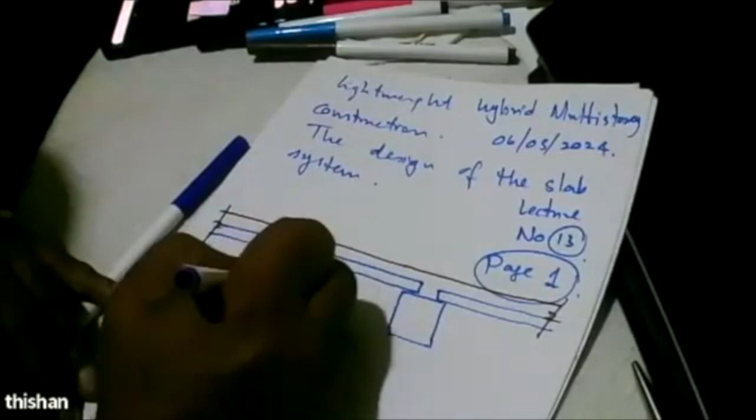This is the in situ cast concrete. Then we looked at this possibility of having a link like this, because we did not want to have connections only through bond. We always wanted to have a positive connection. So we run an 8mm bar that way, and then we have a bar to lock it, and then we have the top reinforcement for the slab running up to 0.3L.

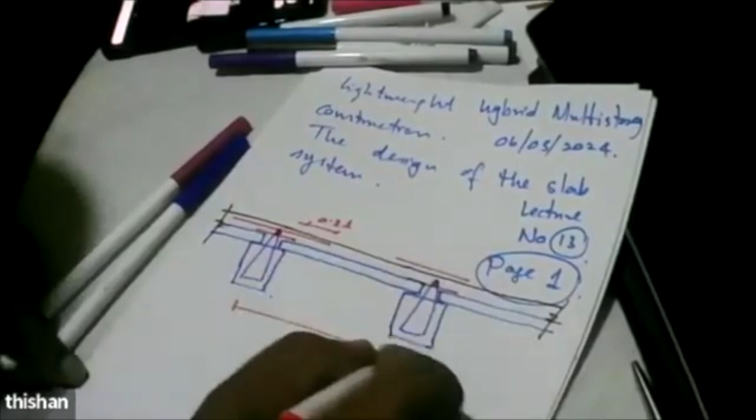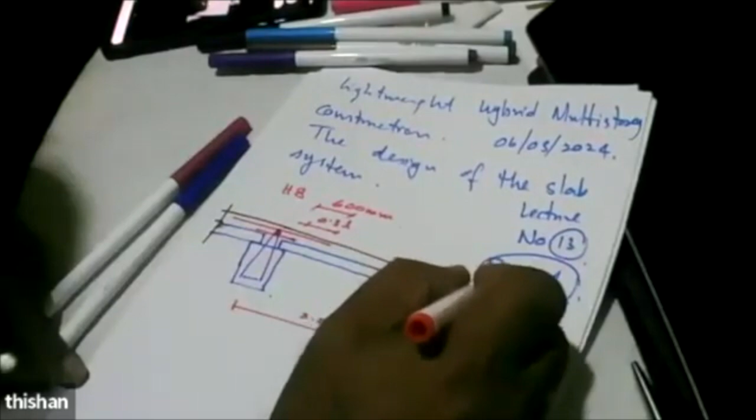So this is 2 meters. So we can have this top bar over a length of like 600 millimeters, and it's an H8 bar, 8 millimeter bar. Here also we'll have a bar like this, above this, here 600. That is an H8 bar.

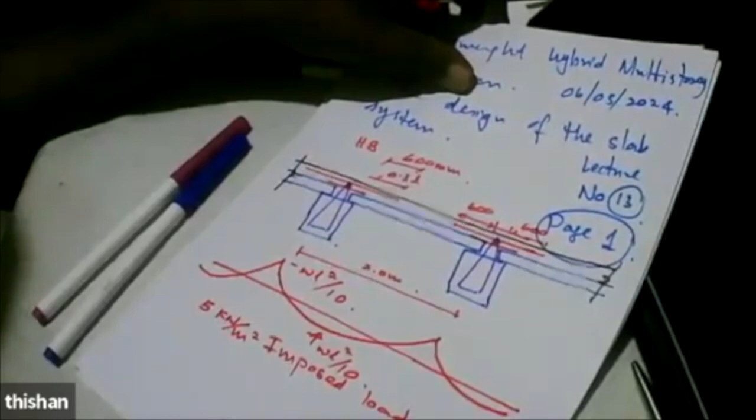And we said that because of all this reinforcement, the slab will behave like this. So we can design the slab for wL squared over 10, and what we showed was, even for 5 kilonewtons per meter squared imposed load, what we want is 1 H8, but we provide 2 H8. This means that we can actually go for even 7.5 kilonewtons per meter squared load on this slab system, provided the beam is strong, has adequate capacity. So that is the scenario.

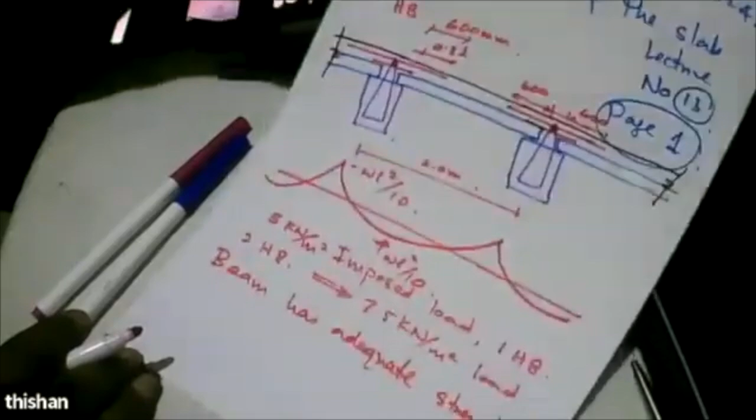So let's look at a typical application by looking at a house plan of a large house, so that I can show you real applications. Let's take an example of a house having something like the garage, maybe 6 meters this way and about 6.2 meters this way. Then we have an entrance lobby and a bedroom.

So let's say this is about 3 meters, this is about 4 meters, this about 3.5 meters. And then we may have this 3.5 and 1.5, something like this. The entrance, washroom, and this is an arch. Then we have the staircase. Here we have a garden. Here we have the staircase.

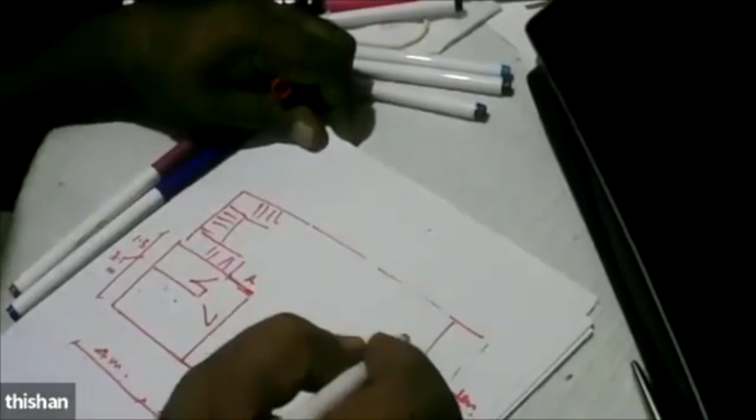So this is about another 5.7 meters. And on this side, let's say we have the wet kitchen and a pantry and a bedroom which has an attached washroom. So let's say these dimensions tally these ones. So these 1.5, and these is about 3.5, and that is here you get 11 meters. 6 plus 7, 13 meters. So it's 5 meters. 13 minus 5, so we get 3.5, 4.5.

So let's assume, I just want to show you the possibility. And here we might have the living area, large living area. So what are the possibilities? First, we'll take this example. One possibility is running this beam this way and having slabs this way, 2 meters. There is a possibility of running the beam the other way as well. And then here, if you look at this one, 6 meters. So we have the possibility of running the beams this way.

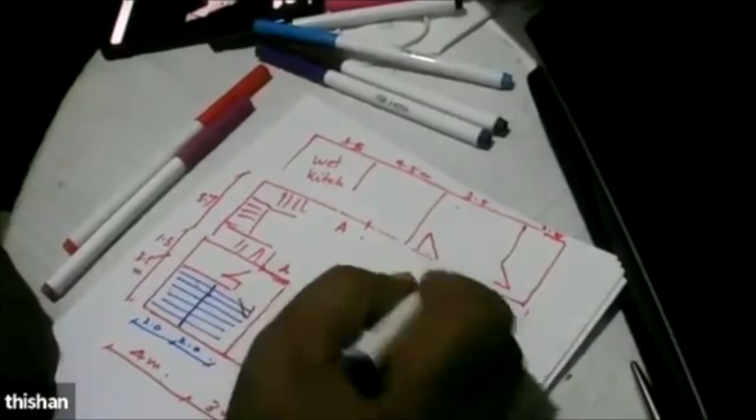Having the slabs like that, every 2 meters we can run a beam. So every 2 meters, when I say 2 meters, we run the slabs this way.

These rooms, we have the possibility of running the slab this way, because this is going to be something like 4 meters. So we run the slab this way.

So these are all possibilities. And the washroom we can run this way, because we need a drop. So here also washroom can be run the other way.

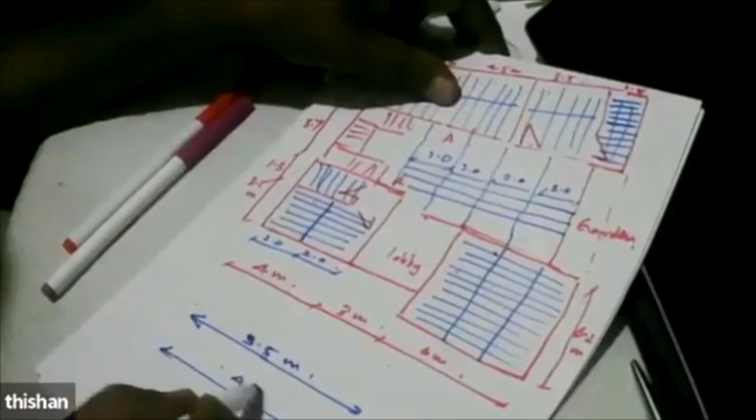So when you look at this example, we can identify two typical situations. One is the beam is spanning something like 3.5 to 3.5 meters. Another case is beam is spanning 4.5 meters. The other possibility is beam is spanning 6 meters as a typical case.

So, in a house, the imposed load can be 1.5 kilonewtons per meter squared for bedrooms. It is 2 kilonewtons per meter squared for living, dining, pantry, and so there isn't a big difference between 1.5 and 2.

So for the design of the beam, we can consider something like 2 kilonewtons per meter squared. Banduk, is that clear? Yes, that is clear, sir. So I'm taking a typical example so that we can provide the answer for a real case, right? Yeah, that is fine, sir.

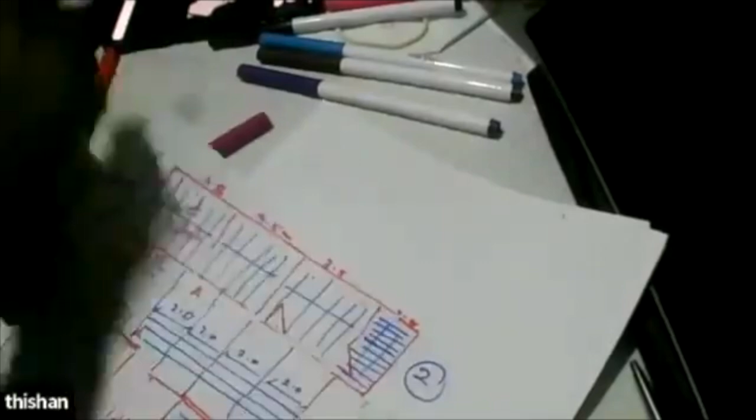Okay. Right. So now we have to see. So we'll take the simplest case, 3.5 meters, and this page number 2 of 6.

So if you take a typical case, now another thing that you can observe here is, now this may be a blind wall. That is a blind wall. You can see all these slabs can span onto the wall. Here also it can be an opening or whatever, but it can span onto the wall. But here the chances are, here we'll get a big opening for the cars.

So these were the cars. So what are the chances? So we can have a column. Now, when it comes to the column, we have a debate. What is that? 9 inch, 225 by 225 column.

Or if you are using this strong block work, because we want to make the structure as light as possible, so we can have the standard SLS 855 complying block having a length of 390. This 390, this 150, height is 190.

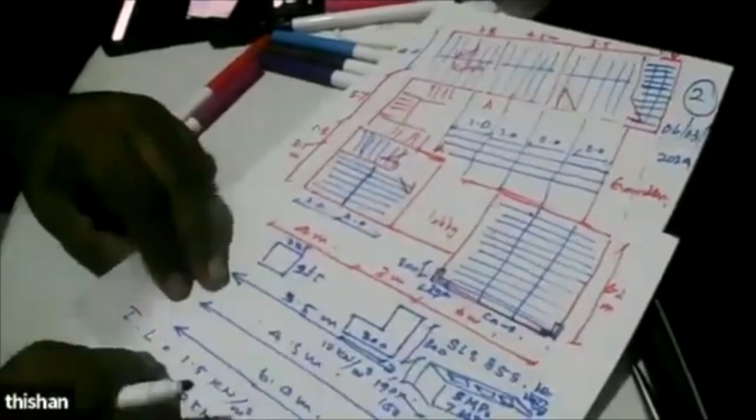because it cannot buckle easily. Each side is 300 millimeters. So this side is 300. This side is 300. The area of the column is more than the area of a column like this. The area is more.

So it is like the area is equivalent to a 300 by 225 column. Area is small.

So what you find is this particular column has more strength, but most importantly, it can be flushed with the wall. Wall is 150. So there's a particular advantage because you can't see the columns.

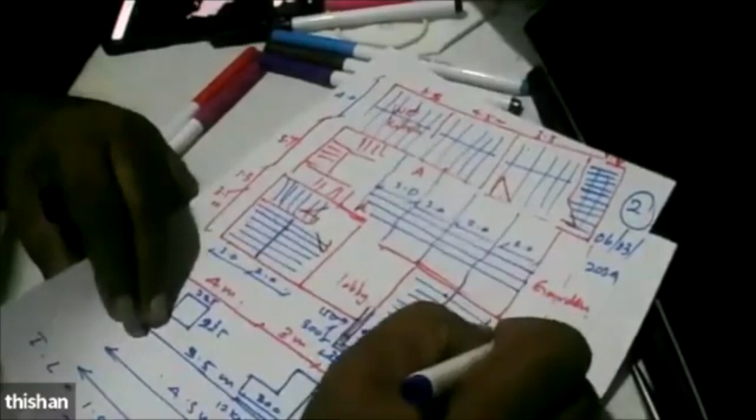So we might run another column here and another column here. Why? Because we might need a beam here, since this can be a window opening connecting the garage with the window. Similarly, we might need a column here and a column here and another beam this way. Why? This can be a large window opening to the garden.

So wherever there's a big opening, we'll use columns. So we have a column here, we have a column here. Similarly, this outer wall might have a lot of openings, so we can have some columns there.

Run a beam here. Why? Because we have columns and large openings. These are openings, large windows, doors. But here we have only small openings, so above those we can have lintels. So we don't need many columns on this wall.

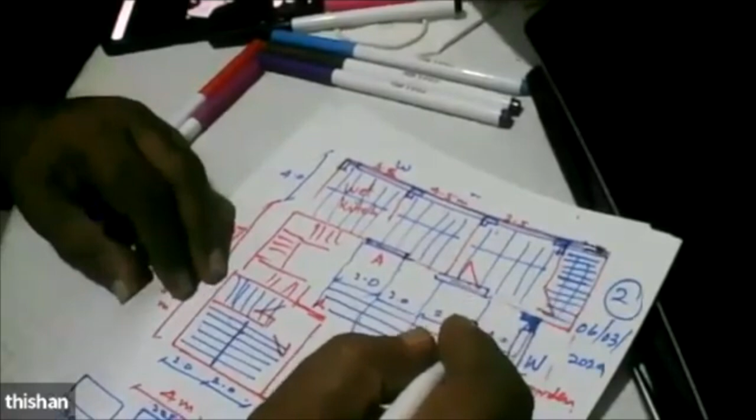Similarly, we might have a big opening here. We might need a column here, run a beam, and we might need to run another beam this way, and we might need a column so that we can run a beam this way. Now you can see we have few columns, but the beams are run only in one direction.

So there is no beam here. The wall can straight away take the weight of the slabs. And here no beam, so the wall is taking load. These are load-bearing. These are load bearing because we don't have any openings on that side.

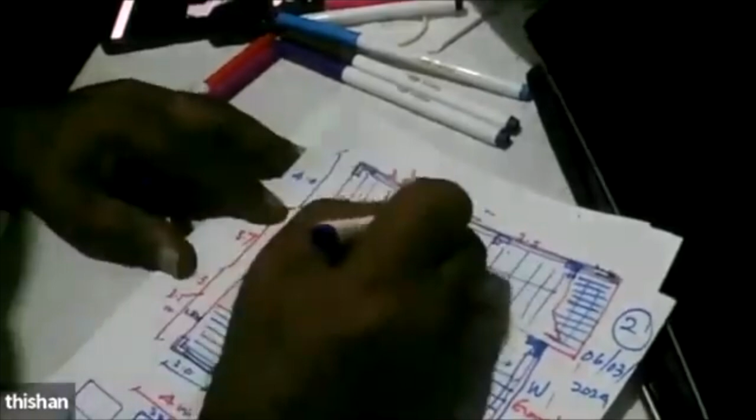These also load bearing. These are all can be converted to a load-bearing wall if you are going to place the beam this way and run the slabs this way. But in this case, though it can be a load-bearing wall, we are not transferring a lot of load to those.

Is that clear, Bandhuka? Yes, that is clear, sir.

So basically, we have a lightweight material. And when you look at the vertical load transfer, we have the concrete frame structure partially. What is the rest? Rest is load-bearing masonry. So we call it a hybrid system, because in a normal multi-story house, we try to transfer most of the loads onto the frame structure and use masonry primarily as an infill material.

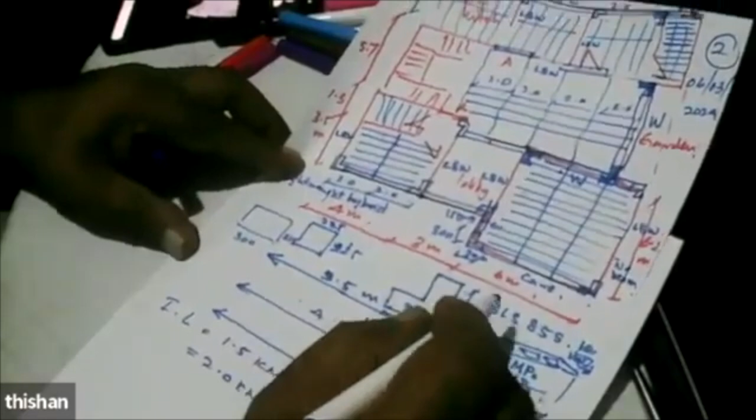But in this particular system, by using a masonry which is strong, very strong, what we do is we are transferring the loads onto the masonry and onto the concrete, and we are sharing the load of a lightweight slab system. We are sharing the weight of a lightweight slab system.

So in this lightweight hybrid system, we are using masonry of lower density because the masonry has holes, hollow masonry. But it's super strong, it is twice as strong as brickwork. Right? But it needs much less material.

So what is the main problem we have today? The main problem we have today is the cost of sand. Why? In Sri Lanka, we mine the sand in Manampitiya, from the river, sometimes it's mined, and it has to be brought over 250 kilometers in lorries, where the maximum the lorry can give is 3 kilometers per liter of diesel.

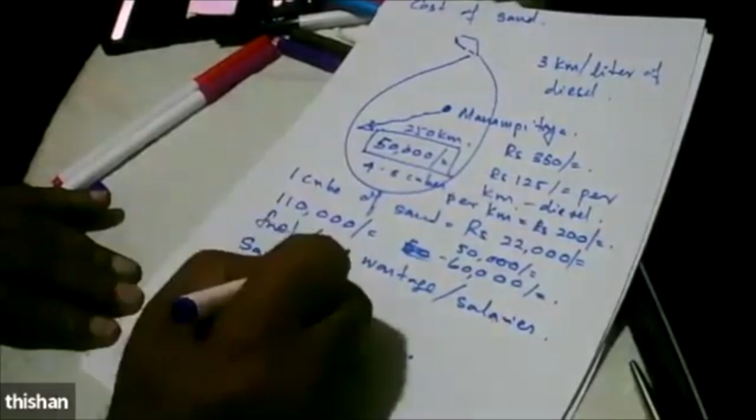So when you look at all these things, sand is priced at rupees 22,000 per cube. 1 cube is 2.8 meter cubes. So 1 meter cube has a cost of what, Banduku?

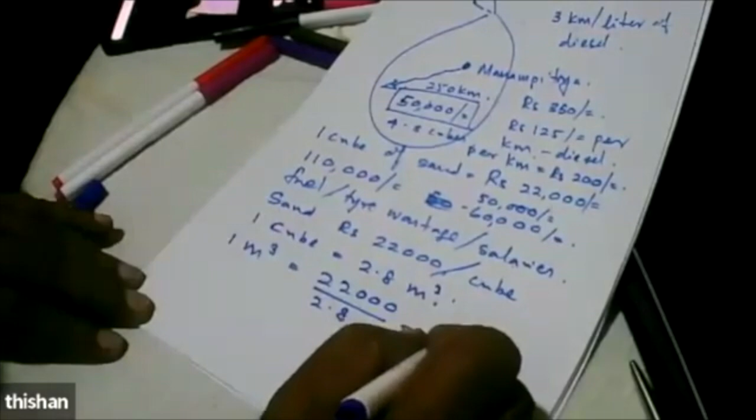22,000. 7,857, 7,000, 857 rupees. And 1 meter cube of sand has a bulk density. These are the solid materials we buy - we buy the bulk material at 1,500 kilograms per meter cube.

So what is the price of 1 kilogram of sand? 1 kilogram of sand is about 5 rupees. Is that right?

Yes, 5.24. So let's say, after allowing for wastage, because when we buy 1 meter cube we might not get it fully, we can say the cost is about 5.50 rupees per kilogram.

Now you can see the crisis in the construction industry. We pay 5.50 rupees per kilogram of sand. Can you see the problem, Bandhuku? Yes sir, and out of this 5.50, about 4 rupees goes for transportation - that we never thought, right? So we have a huge crisis.

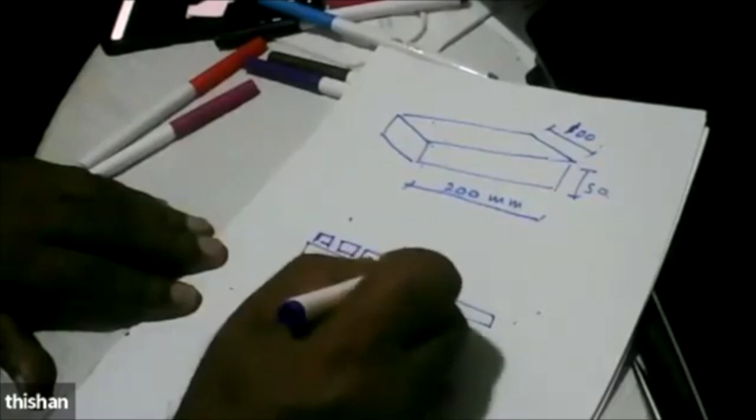So now we try to do the brickwork. We get around 15 to 10 millimeter mortar, and it's customary to have the English bond, and we run the next layer. So with this size, we need about 15 bricks for a 220 millimeter wall, maybe 210.

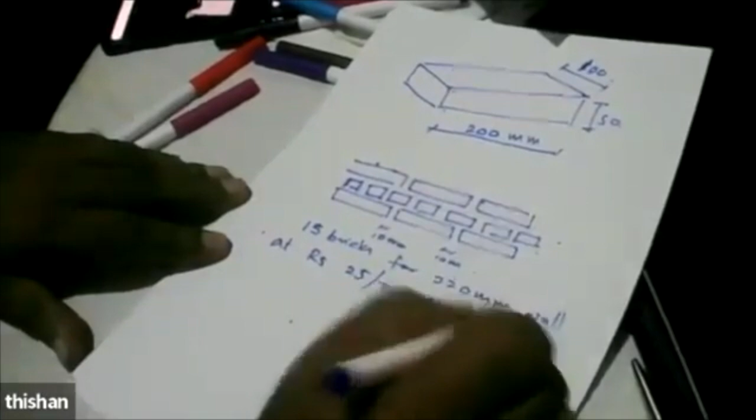15 bricks for a 220 millimeter wall at rupees 25, plus mortar. So 25 into 15 comes to 375 rupees, plus mortar cost or labor cost. When you add all that, 1 square meter of brickwork can cost about 9,000 rupees.

Whereas if you look at this lightweight block work, the block has a cost of 150. So it needs about 175 rupees per square foot, plus another about 50 rupees worth of mortar, plus another 150 rupees to construct. So you can see it comes to about 250, 225, 325, 375, 400. So 1 meter squared of 150 millimeter hollow block - what is the cost? Maybe 4,500.

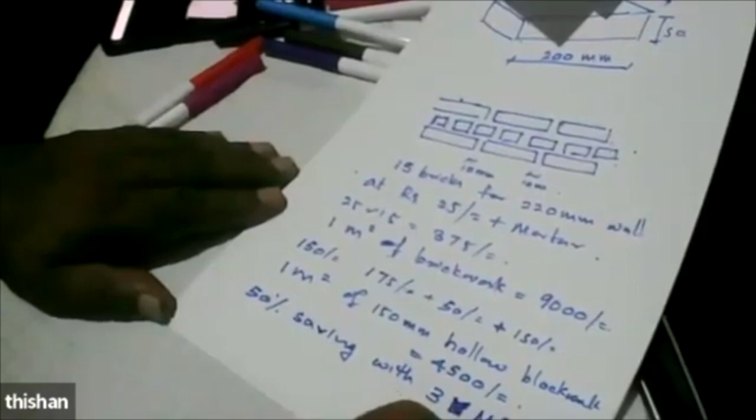So here we get 50% saving with 3 kilonewton, 3 megapascal compressive strength. Three megapascal compressive strength will allow hybrid construction, and we are using our lightweight slab. So we have lightweight, hybrid construction, but we can go for multi-story - up to 4 floors.

So you can see we can achieve a very significant cost saving. But the problem with brickwork is brickwork has so many joints.

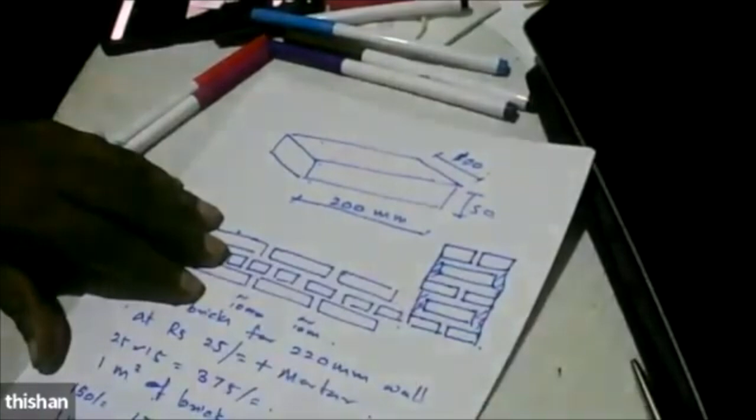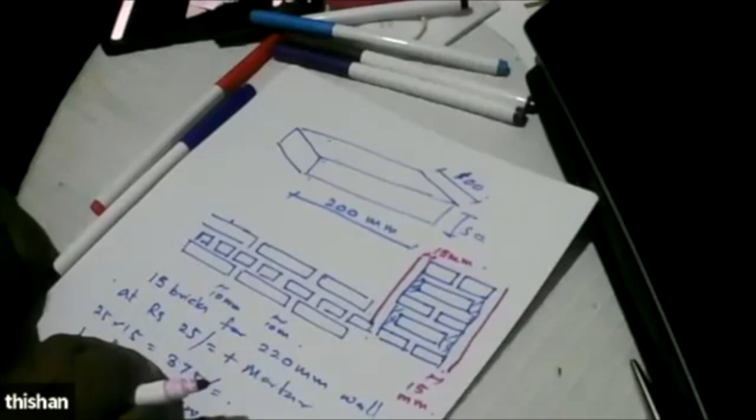While constructing, though we try our best to construct it as vertical as possible, the brickwork tends to deform a little while the construction goes on, until it hardens. So you'll find even if you've constructed the wall almost perfectly, one problem is there's a lot of mortar - here you get mortar, here, here, here. Every joint has mortar, so a lot of sand goes, a lot of cement goes. So the cost of construction is very high, around 9,000 rupees per square meter.

Whereas in the block work, we can reduce it to about 4,500 or sometimes even lesser. So how do we do this block work construction? The block has a top.

So we turn the block upside down, because in this block the bottom is solid. So we have this - bottom is solid. So what we do is we turn it upside down, so what you see is a solid block when you turn it upside down, because the hollow part is hidden underneath. Then what you do is you lay it on a mortar bed.

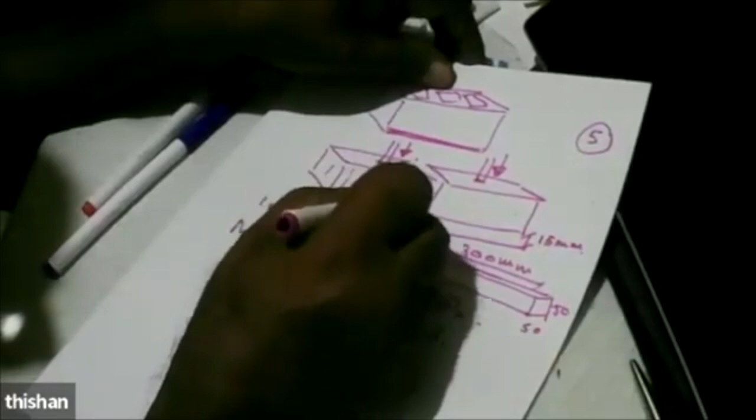Blow to the center - what happens? These were wet mortar, M4 mortar, that is capable of generating a strength of 4 megapascal with 1:5 cement to sand. What happens is this mortar will squeeze into the holes in the block and lock it.

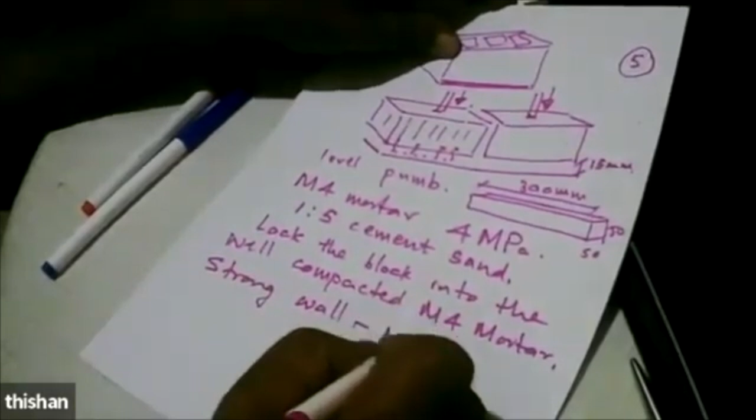We lock the block into the well compacted M4 mortar. So what do you get? You get a strong block, a strong wall. Because of this locking, there's not much buckling or deformation during construction. So the block wall will be very straight.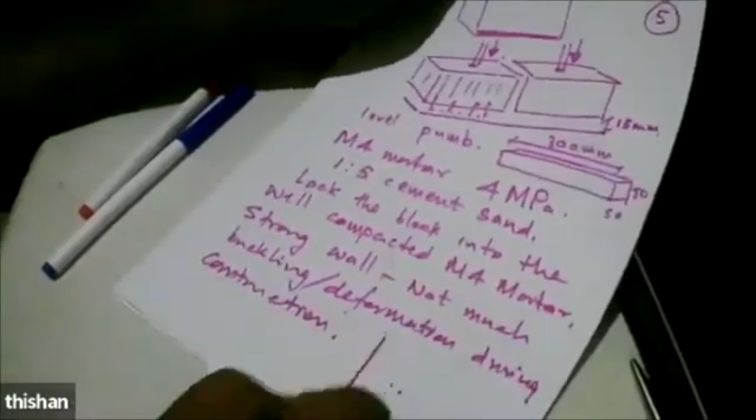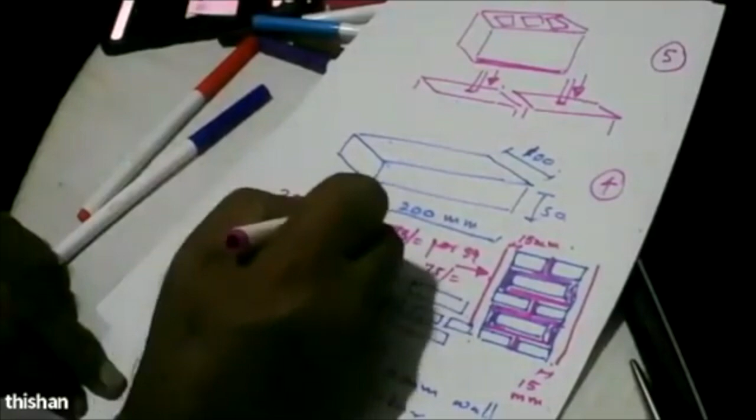So if you look at this 15 millimeter plaster, they charge about 75 rupees per square foot, and it costs about 75 rupees for material as well. So plaster in 2 phases can cost about 3,000 rupees per square meter, or 150 rupees per square foot.

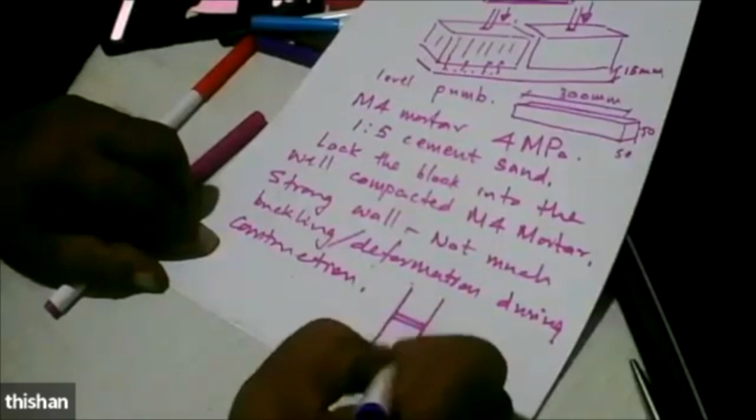On that, you have to do all the finishes. But here, we are getting a wall almost perfectly vertical. While constructing, you use the sponge, first you use the plane and level it, and then use a sponge to make it a perfect wall so that it will be ready to receive a thin plaster of 3 millimeters.

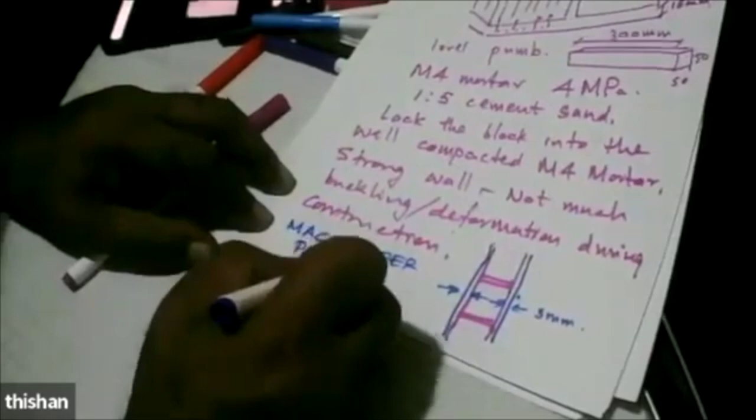So there's a cement-based plaster, manufactured with research done in Sri Lanka by a very innovative person called Mr. Dhammika from Padukka, and he sells this as Maco Super Plaster, which can be completed for a thickness of 3 to 4 millimeters, and these are dolomite based. We actually helped him when he was doing research at the Department of Civil Engineering, because we saw the huge potential in his products.

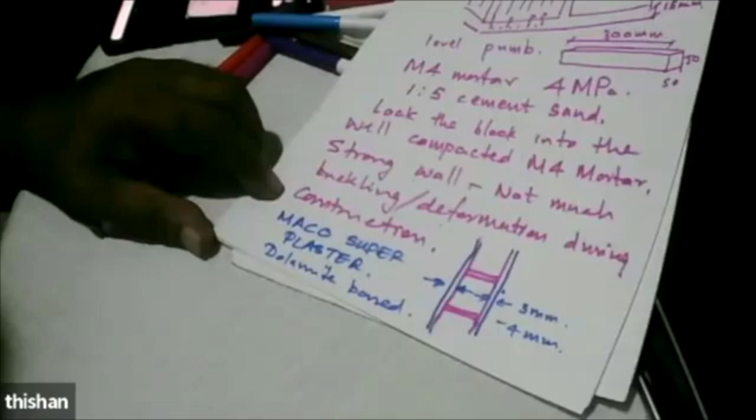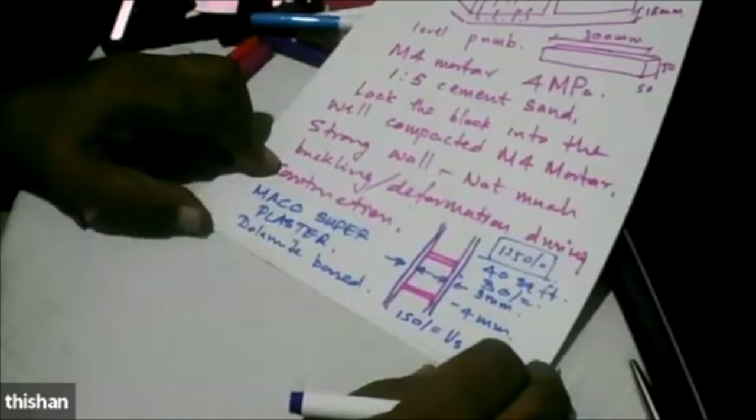So a 20 kilogram bag costing about 1,250, purchased directly, can cover about 40 square feet, giving a cost of 30 rupees per square foot, which is a significant reduction from 150. So you get 150 versus 30 rupees, and since coverage is more, the labor cost is less. So 300 rupees can be brought down to about 100 to 125. So you can get a saving of more than 50%.

Is that clear, Bandhuka? Yes, that is clear, sir.

So you can see in this system, we are saving wherever possible. First, we use lightweight blocks, but they are load bearing masonry, having a strength of 3 megapascal or more of wall strength.

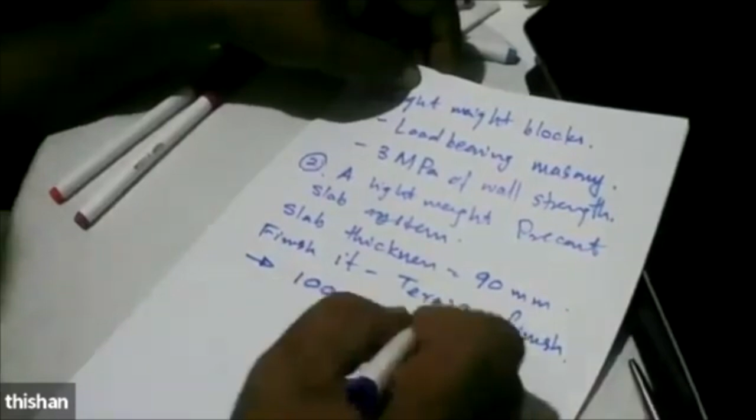Number 2, we use a lightweight precast slab system. Slab thickness is 90 millimeters. And if you want, you can finish it with terrazzo finish, or you can make it so that with the overall thickness of 100 millimeters, you can complete the tiles. So including the tiles, the thickness will be 100 to 110 millimeters.

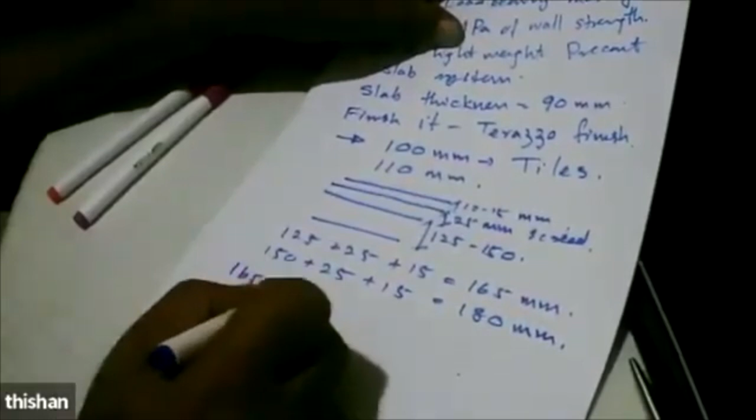So it's a significant departure from slabs of 125 to 150 millimeters, plus 25 millimeters of leveling screed, then tiles giving about 10 to 15 millimeters with tile bed - a huge departure from an overall thickness of, say, 125 plus 25 plus 15, giving 165 millimeters, or it can go up to 150 plus 25 plus 15, 180 millimeters. So an overall thickness of 165 to 180 is reduced to 100 to 110.

So can you see why we call it a lightweight system? Mandukar?

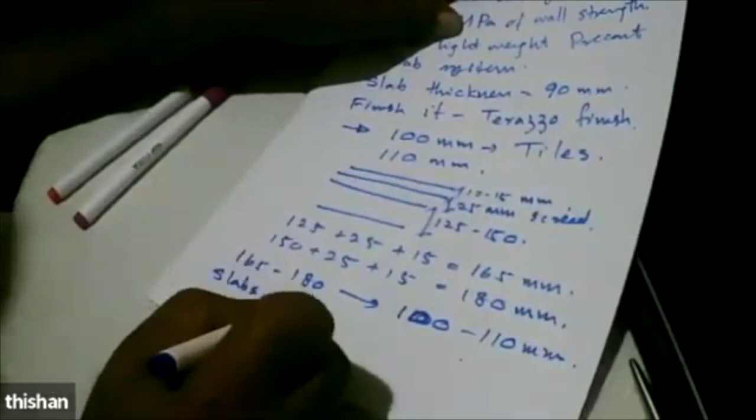So slabs are lightweight. But some of the slabs can be directly supported by the load bearing walls.

So you can see that's number 2. So we have lightweight slabs, we have walls, and we have a frame carrying vertical loads - walls carrying vertical loads from slabs. So we call it hybrid. Because it's lightweight, 3 megapascal is sufficient to bear the load of up to 4 slabs. The weight of up to 4 slabs can be taken by these walls.

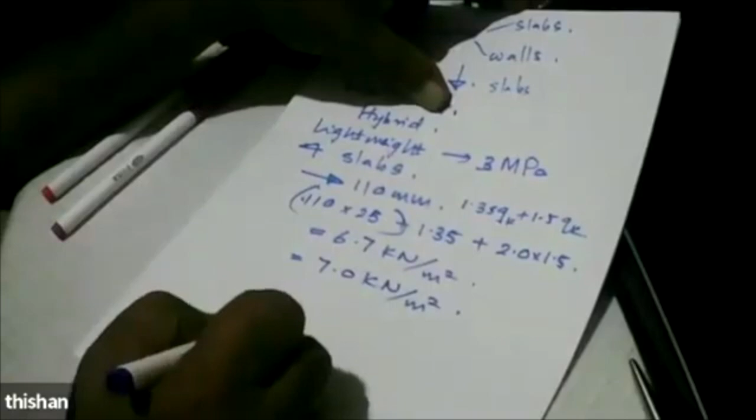But when you look at a wall, 150 thick - this is the precast slab, this is in situ cast, but there's a beam here. The span is 2 meters. So how does that load go here? At each floor level, the wall carries self-weight, and in addition to that, it can carry 7 kilonewtons per meter. Then again, it will carry the self-weight, then again, it will carry 7 kilonewtons per meter.

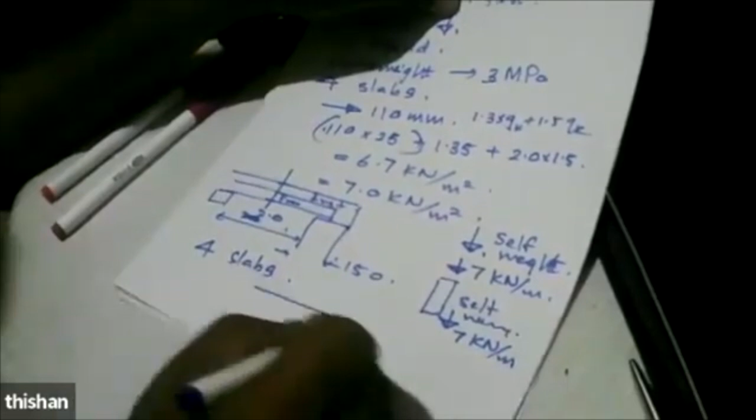So you can see this hybrid system can easily go up to supporting four slabs. Why? If you have a normal load bearing system, we might have a load of about 9 kilonewtons per meter squared. We have a load bearing wall, this may be about 4 meters, so half of this load goes there. So that means at every floor level, we are transferring about 18 kilonewtons per meter.

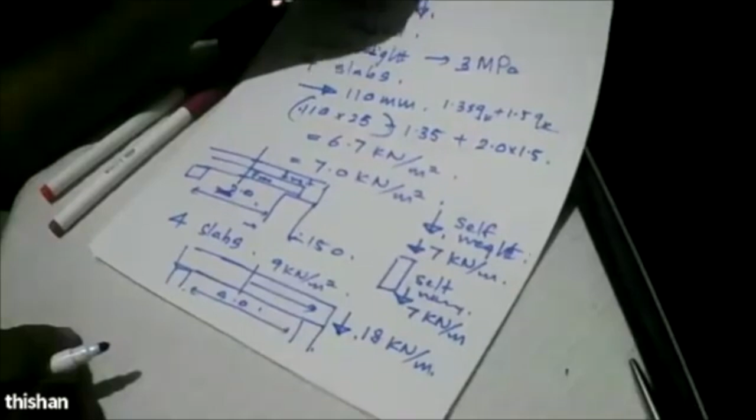Even with that, we can easily go for 2 stories. But in this particular system, we have reduced the load on the wall up to 7 kilonewtons per meter. Because of that, we can easily use this system to go up to 4 floors, and if construction is done carefully, you can maintain a factor of safety above 4 with 5 slabs. That means ground floor, first floor slab, second floor slab, third floor slab, fourth floor slab, and even a roof slab can be supported.

So this hybrid system is very efficient because of this particular slab system. Not like a solid slab, it transfers loads into one direction, but those loads are very lightweight. Is that clear, Vandana? Yes, that is clear, sir.

So the other advantage is we cast it like this. We cast the beam, the slab, connect it, finish it with terrazzo, or we finish it with tiles directly on this.

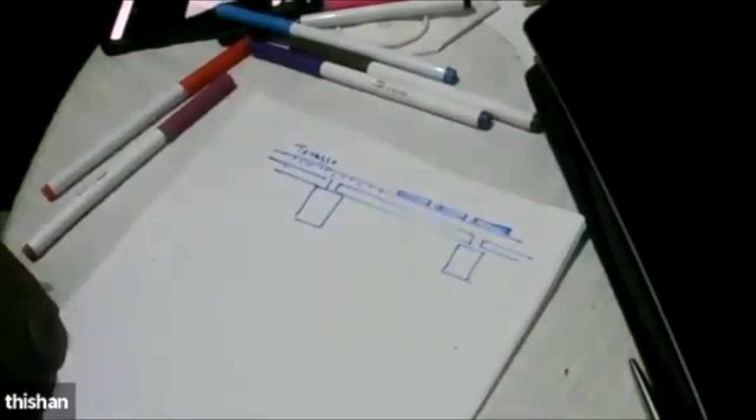If there's a minor variation or a little bit of unevenness, we can use a terrazzo cutter and cut it, then fix the tiles. Or give the terrazzo finish with marble and broken windscreen pieces and get a nice finish. Or else we can fix tiles directly on it.

What we can do is use this thin plaster as the soffit - a 4 millimeter plaster instead of soffit plaster, because it's a putty. It can be cement based putty, not lime based.

We can give huge coverage. We know soffit plaster labor cost is high, because doing a soffit plaster takes much longer than a normal plaster on a vertical surface, since we have to do it hanging. So the labor cost for soffit plaster is much higher, but here we are using a putty, which means it takes much less time to cover the soffit and the walls. It's super fast - a huge saving in labor is possible.

If you look at this versus conventional slab, we have the screed - 25 millimeters. Even if you try to get 20, it's very difficult, because masons are generally more comfortable with 25 millimeters since they don't do the slab properly. So this is 125 to 150 millimeters. Then we have the tiling, and then a soffit plaster, another 10 millimeter.

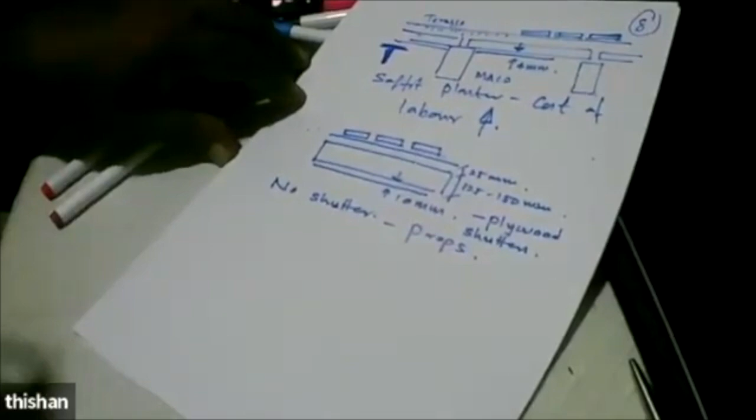So if you look at the overall situation, we save on the slab - lightweight, wall - lightweight, columns built into the wall, so no special plastering for columns. Otherwise, plastering a column is also a costly item. But the column is built into the wall, so no special plastering is needed.

Then walls are load bearing, so no thick plaster needed, only a thin plaster. So we save a lot on this.

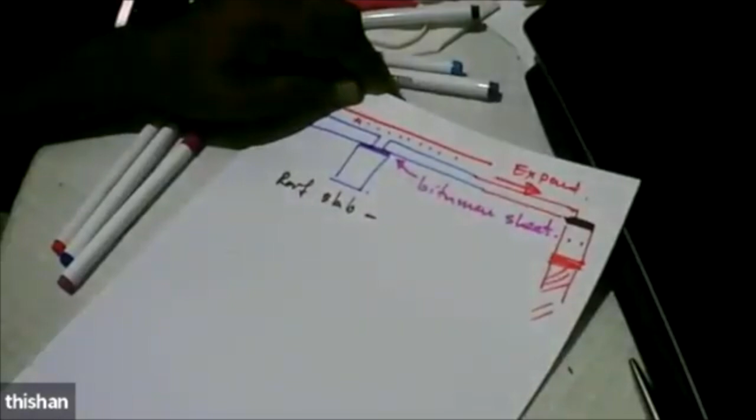But why do you need a roof slab? We like roof slabs because we build on 150 to 250 square meter lands, or 6 perch to 10 perch lands. We build on these, and once you do that, they are generally subdivided like this.

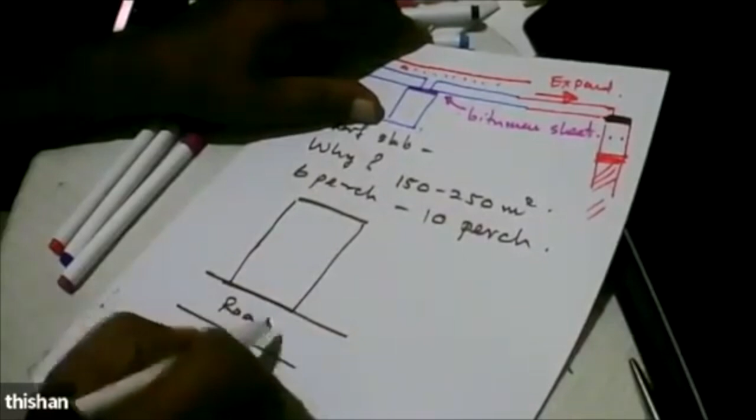This is the road, narrow, about 10 to 12 meters. We'll have a rear space - it's a must, we have to keep 3 meters at the rear. If it is a subdivided land, there's no building line, so you can bring the garage up to this level, but you need to keep 1 meter distance here, and you can bring the house up to that level, if it is subdivided land.

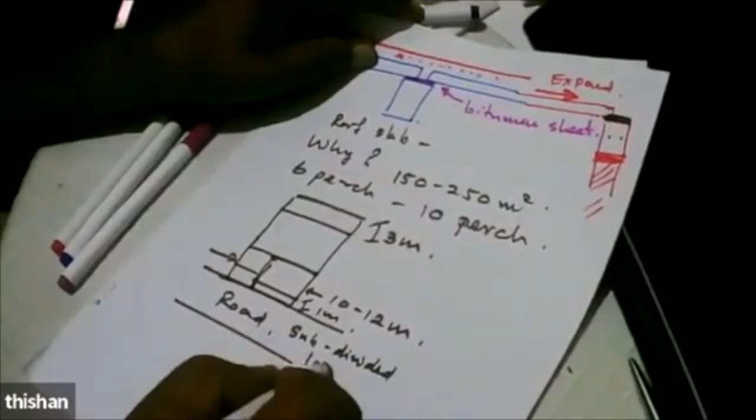Otherwise, if it is facing a main road, you will have a street line and a building line. So the building line is only 1 meter if it is subdivided land, like auction land. So we have very little space for garden.

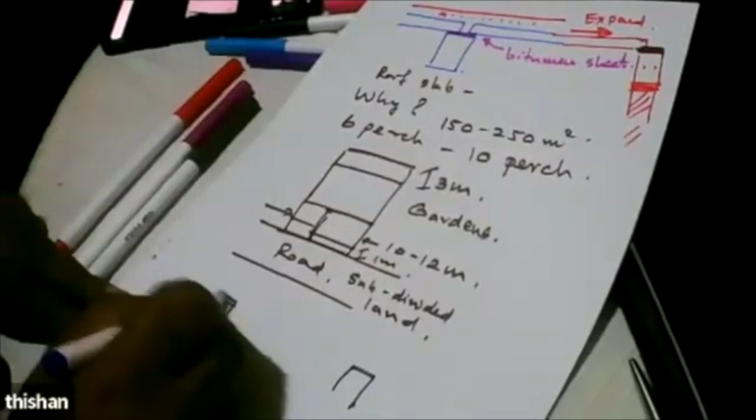So many people like rooftops, but rooftops give a lot of trouble. So how to minimize the trouble given by rooftops? That is the important question. So separate it with a bitumen sheet, separate it, and have the slab.

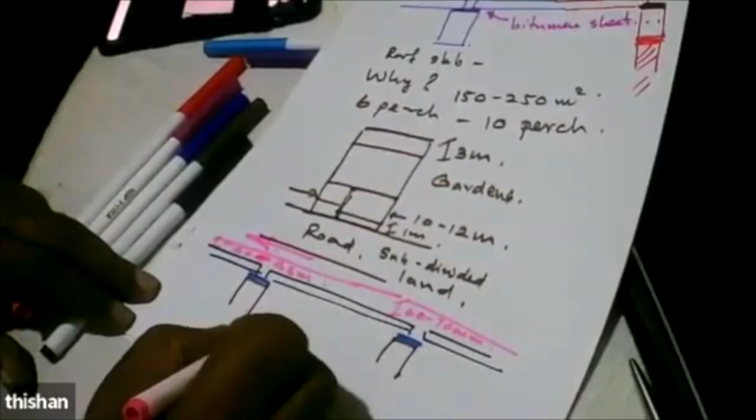All the roofs leak because of lack of drainage. So we start with 60 to 70 millimeters, we finish with 40 to 45 millimeters. We create the drainage path with concrete. The moment you create a drainage path with concrete, with rains lasting a maximum of 2 to 3 hours, all the rainwater is drained properly, and you don't get a big waterproofing problem.

That is avoided by providing good drainage. But still, it can absorb heat during the daytime. So there are two options. One is to have a white color floor paint.

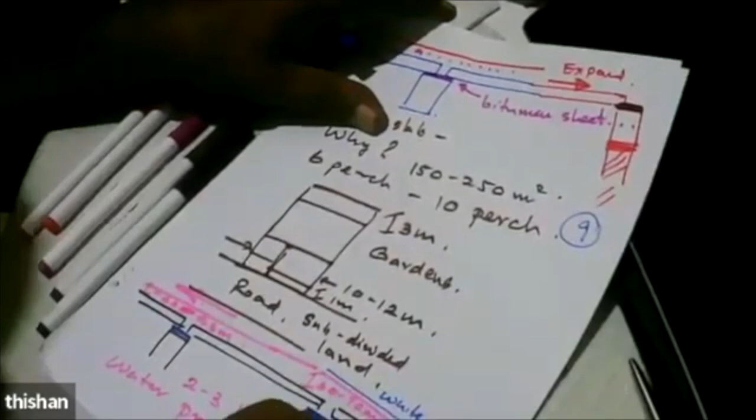On the white color floor paint, you can apply a water-based varnish. So the white color surface can be washed if it is dirty. The moment you make it white color, you absorb less heat - the absorption becomes 20%. And cement color absorption can be about 55%. So it minimizes the amount of heat transfer.

But there's another very useful solution, and that solution is to have a greenhouse. So the concept is we have a sloping roof, a flat soffit, separated.

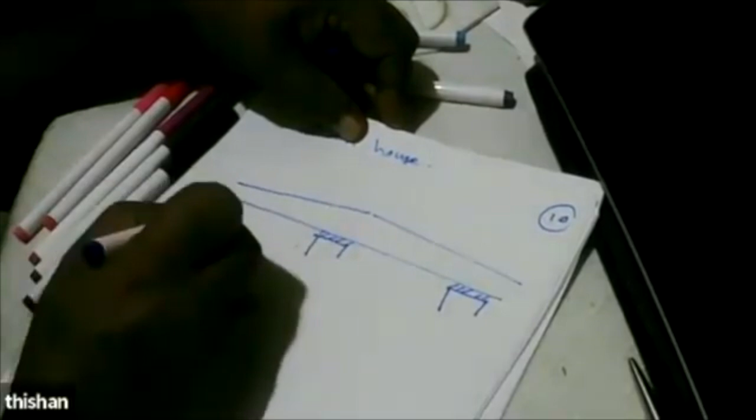There's a bitumen sheet, which is not a very good thermal conductive material, so this slab is free to expand and contract. We can create PVC pipes, we can create small greenhouses with a zip here, so that you can open the zip and go in and attend to all your plants. The concept is small greenhouses, rather than creating big greenhouses - you create a number of small greenhouses like 2 meter by 2 meter.

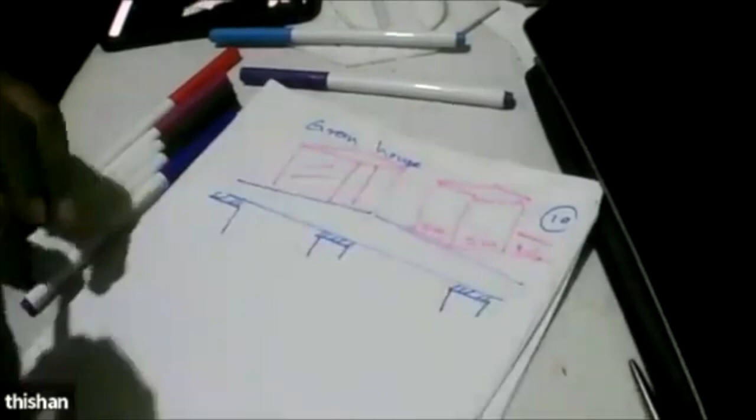The moment you do that, part can be covered with solar panels. Likewise, you can use a big concrete cylinder with a base and plant some trees. So all those are possible, so that you can create a nice garden on the rooftop, because this system is capable of carrying loads up to 10 kilonewtons per meter.

you can create a garden on the rooftop without having any durability issues, because the roof is laid in a slope. Then you get thick polythene and cover it with soil, or cover it with large pots.

So what is the penalty? To support all these big loads, we need a deeper beam at every 2 meters. So the normal beam may be this size - this may be about 50 to 100 millimeters extra. That is the only penalty.

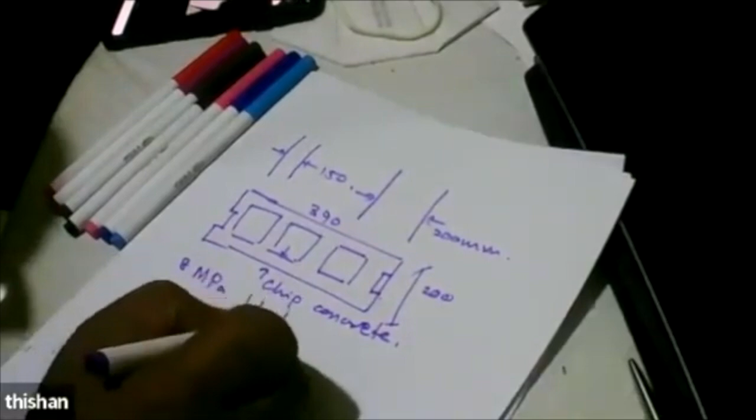So for this out of concrete, chip concrete, let's say you need an 8 megapascal block. Then you can request a company like ICC. What they do is provide you with an 8 megapascal block, and you can use mortar 1:5, cement, sand. Here you can mix river sand with manufactured sand. The manufactured sand can also have a little bit of pozzolanic reaction to get a very strong mortar.

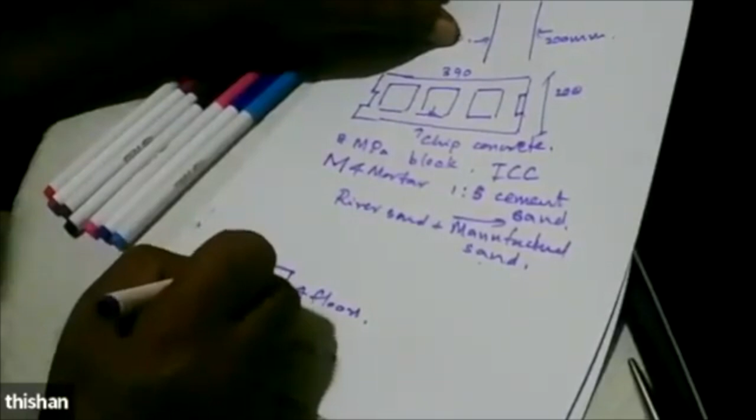My perception is we are doing some research on this, because there are undergraduate projects running to determine the maximum number of floors. One project is in the 8 to 12 story range, another is 4 to 8-story range, another is up to 4-story range. I have done the 4-story one, but this project is done to document everything properly, so it can be presented at research papers, maybe engineering research papers or international conferences held in Sri Lanka or wherever, so that the whole engineering community can make use of the available information.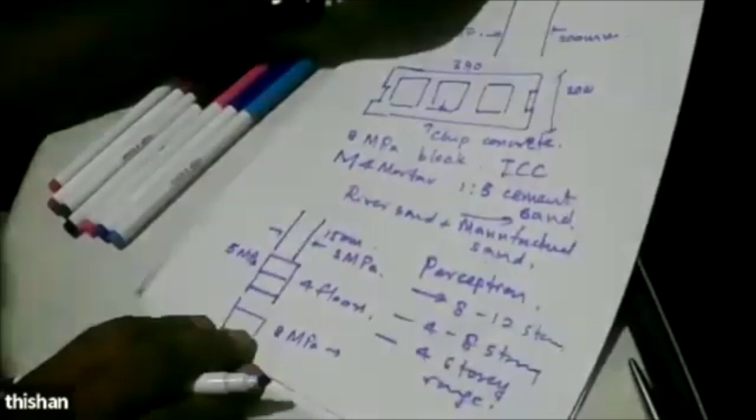So, have I answered the question, Bandhuga? Yes sir, it's right, clear. Yeah, it's clear, right? Okay.

So basically, you can see this is a wonderful system because it saves in many ways. Number one, it uses less material, giving about 50% saving because it needs less steel, less concrete, less formwork. So that is the lightweight slab system.

Secondly, it reduces the number of steps. That means no leveling screed.

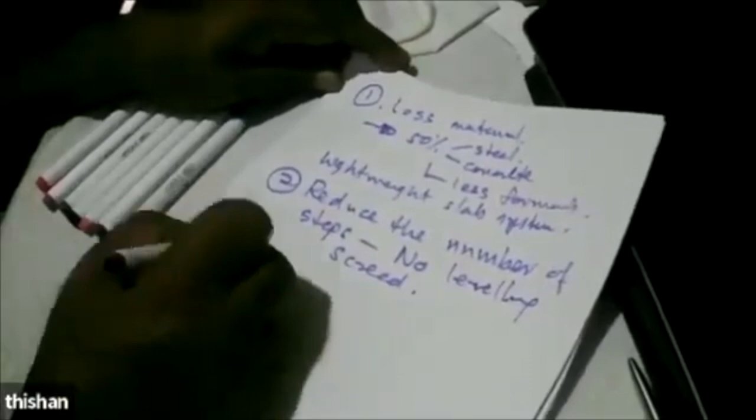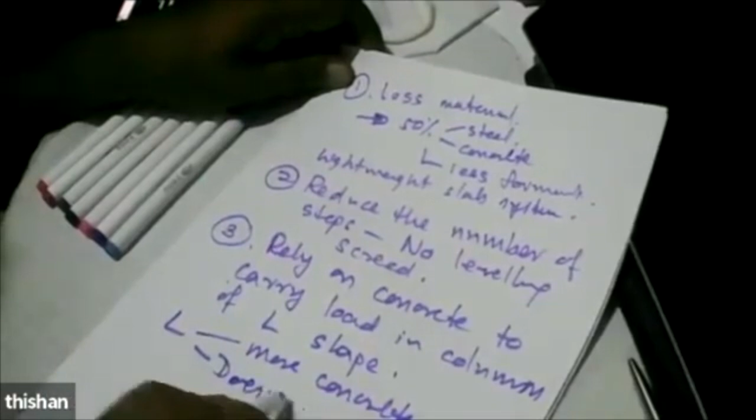Number three, we rely on concrete to carry load in columns of L shape. Why? An L shape column has more concrete area. It does not buckle easily.

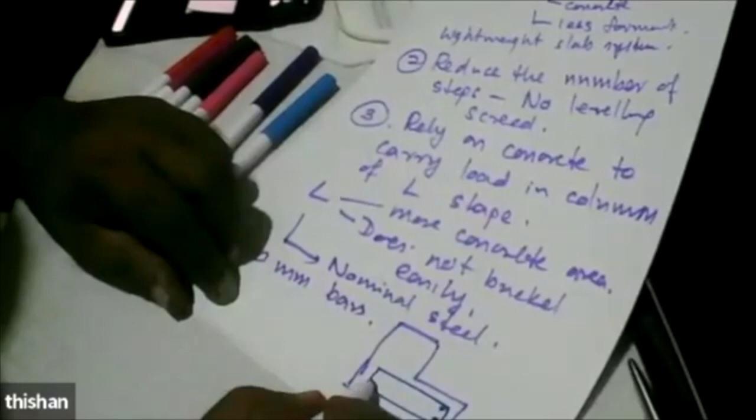Hence we need only nominal steel, so we can use 10 millimeter bars. In columns, the column goes like this, so you need a link like this, and another link that goes like this. We need 2 more bars. Here we tie the link with binding wire, here binding only. So it needs 5 numbers of 10 millimeter bars - number 1, 2, 3, 4.

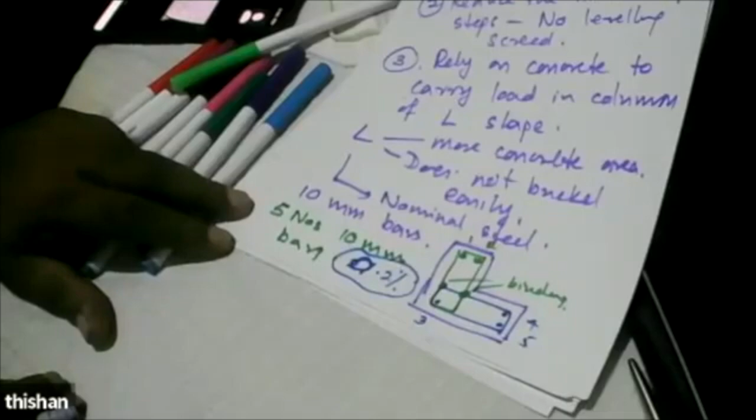Why we can use 10 millimeter bars is the minimum steel content is 0.2% in Eurocodes, and Eurocodes also allow 10 millimeter bars in columns, and these are lightly loaded, because we are not relying on the column alone to carry all the loads. We have a hybrid system, so we can consider these columns as lightly loaded and go for a minimum amount of reinforcement, whereas in normal 2-3 story building designs, you try to transfer all the slab loads onto columns, so it's very easy to see engineers using 16mm or 12mm bars a lot in columns.

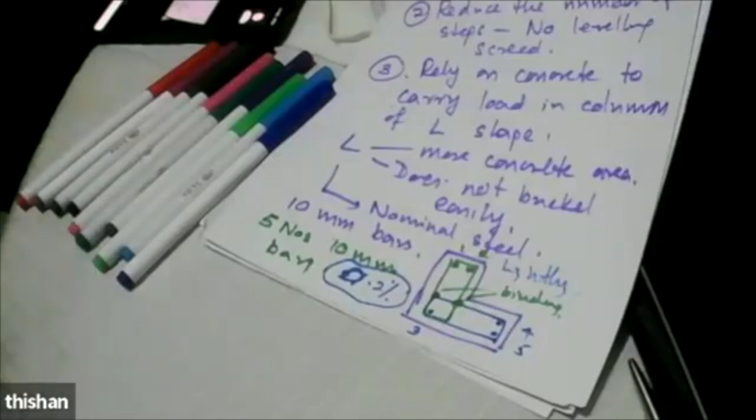But here, what you get is only 10mm bars, and you can use 8mm links at 20 times diameter spacing. So when you use 10mm bars, 8mm links can be used at 200mm centers. And so what you do is, when you're doing the column reinforcement, this is the flow, your column, L-shaped column. We provide 4 numbers H8, because Eurocode says steel yield should be between 400 and 600. So if you are doing strictly Eurocode, you have to use H8. But if you are doing the columns for British code, then you can even use mild steel 6mm bars. But the cost penalty is not very big, so you can use this.

Beyond this, at 200 millimeters, these bars are 10mm. Again here you will have 4 bars at something like 50 to 75 spacing. What is the reason? If it is subjected to an earthquake, this is a frame subjected to earthquake - where to get the plastic hinges formed? And in the beam, you can get it here.

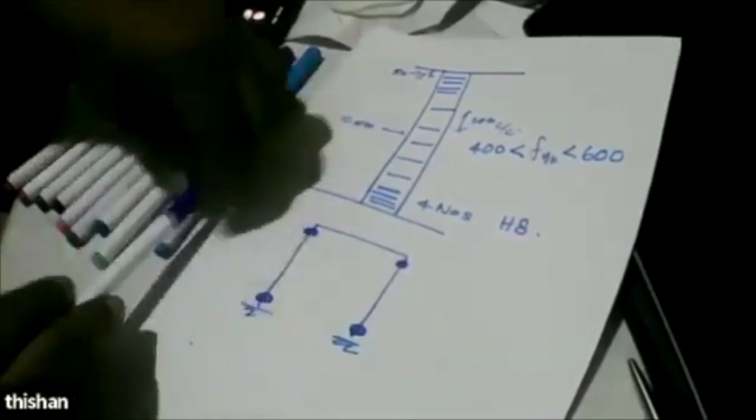So in the zone where plastic hinges can form, we provide higher confinement. So we create a triaxial stress state.

The moment you create a triaxial stress state, if you test a cube uniaxial, it goes like this. Triaxial, it goes like this. And we know this is a stress strain curve.

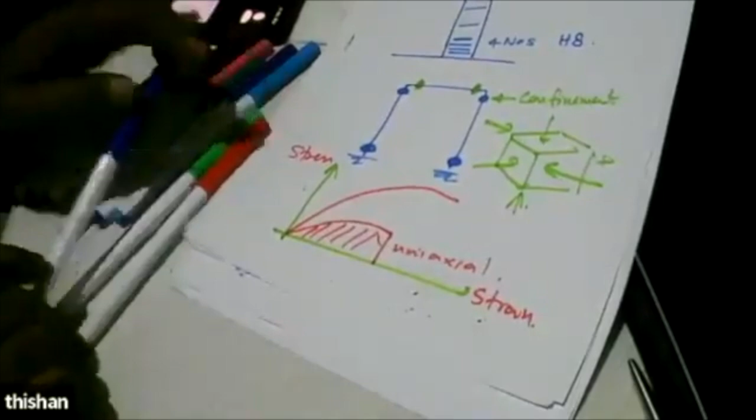So the area under the curve is the energy that the concrete can absorb before it crushes. The moment you create a triaxial stress state, it can absorb a huge amount of energy so that we can prevent crushing of concrete by increasing the confinement.

H8 bars are very good for enhanced confinement because they don't yield easily. So they can confine the concrete and keep it. So we have very lightweight, lightly loaded columns, but with high ductility.

Anyway, in an earthquake, lightweight structures absorb less inertia, so earthquake loads will be less.

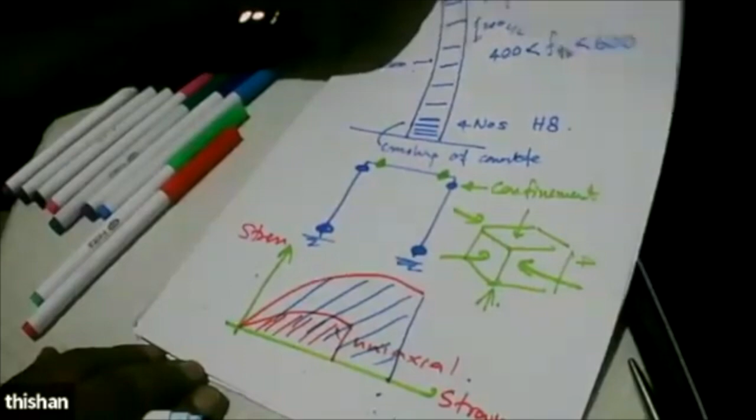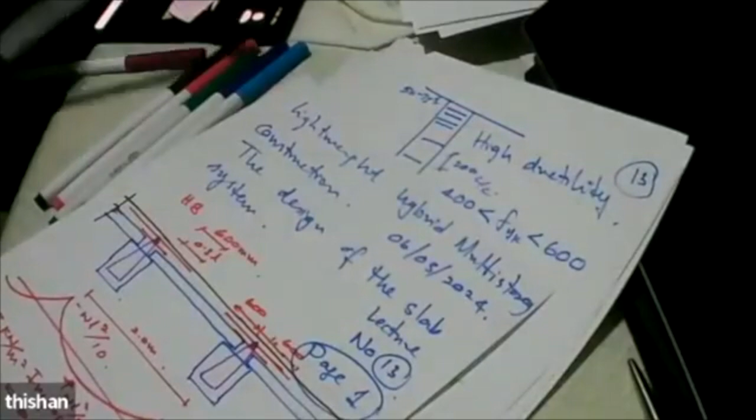Masonry is a strong material because we are using very strong masonry. It's loaded, masonry is loaded fully. Then it's very hard to fail a masonry wall, because what happens is, in an earthquake situation...

What happens is, we have a frame, we have an infill, we have a beam or a slab. So we have the columns. Now we are pushing. So what happens?

Masonry will go into tension. Compression in one direction, tension in the other direction. So tension in the masonry can cause cracks.

But it's heavily loaded. The moment it is heavily loaded, these cracks cannot open. And then the frame will start to move like this. So the masonry here will be subjected to heavy stress.

But we are using a concrete block having 5 megapascal or above. So it's a concrete block, no mortar joints, very few mortar joints, and even those mortar joints are well compacted. Because I told you we are going to tap it with a 2 by 2 joist, 2-inch by 2-inch joist. We tapped it, we compact it fully. All these levels, it's compacted. So it's a very strong wall.

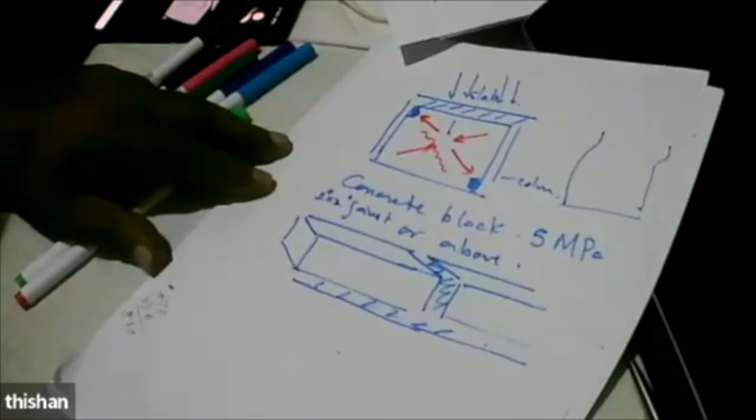So by providing enhanced confinement, we can make the columns extremely ductile, and hence they can absorb a huge amount of energy before the concrete crushes.

Is that clear, Mandukar? Yes, that is clear, sir. Right. So with that, shall we conclude? Okay, sir. Okay.

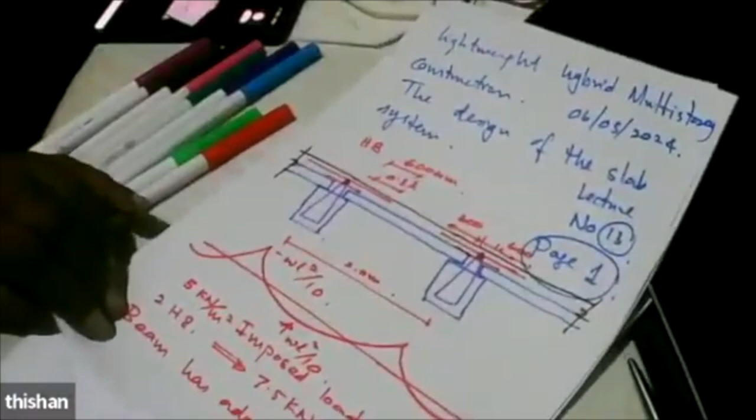Thank you, sir. Yes. Okay. Thank you. Thank you.